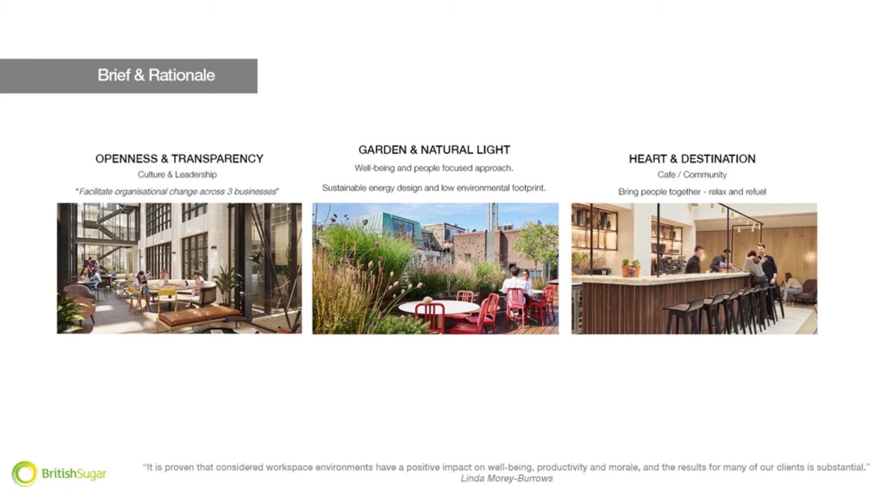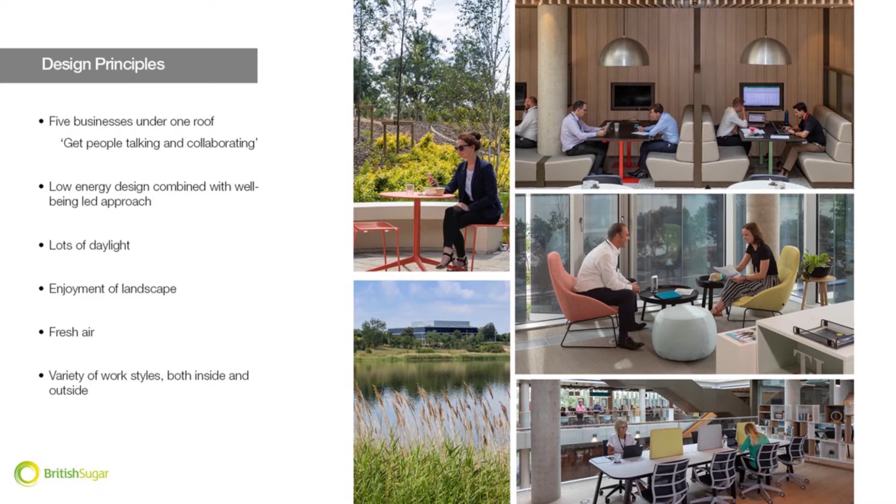From this thinking came these key design principles: a building that brings everyone together collaboratively, that employs low energy and passive house design principles, has lots of daylight and fresh air, and a variety of working environments, not just workstations, but other forms, as you see in the pictures here.

When it came to the site, they were purchasing a site, so they looked at a number of sites and chose this one in Hampton in Peterborough because, for a number of reasons, there was a nearby lake with walking routes around it that they could connect into, which they liked. It had, as you can see in the green around the top of the site, an existing landscape belt that could be reinforced and exploited for external spaces. We were able to form a new access onto the main road, which was key because it meant people could come directly to their building without passing other people's buildings on the way, and they liked that for what was an important corporate headquarters.

When it came to the actual form of the building itself, we settled on a square form, as you can see here in the plan, slightly raised, with views to the lake just to the east, facing southwards and nestled into the landscape belt. So we formed quite intimate external spaces around it. In this picture you can also see another building, greyed out to the west, which is actually a second phase we got planning consent for, but it's not being built at this point.

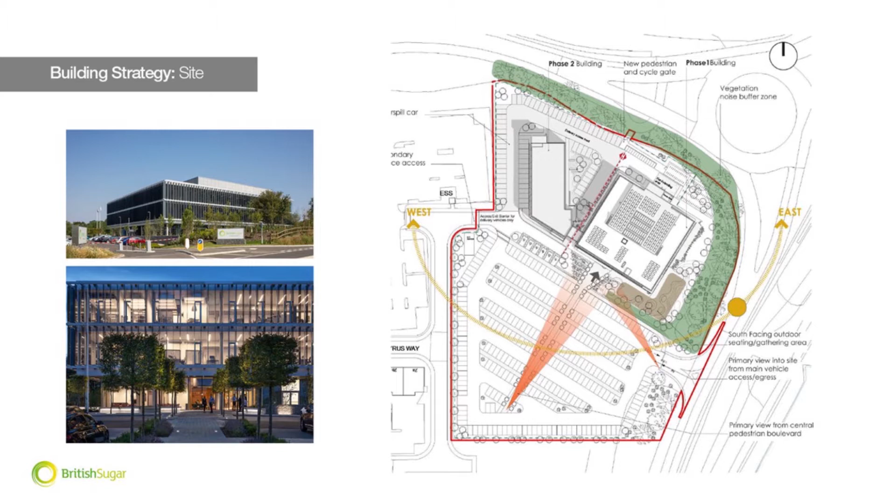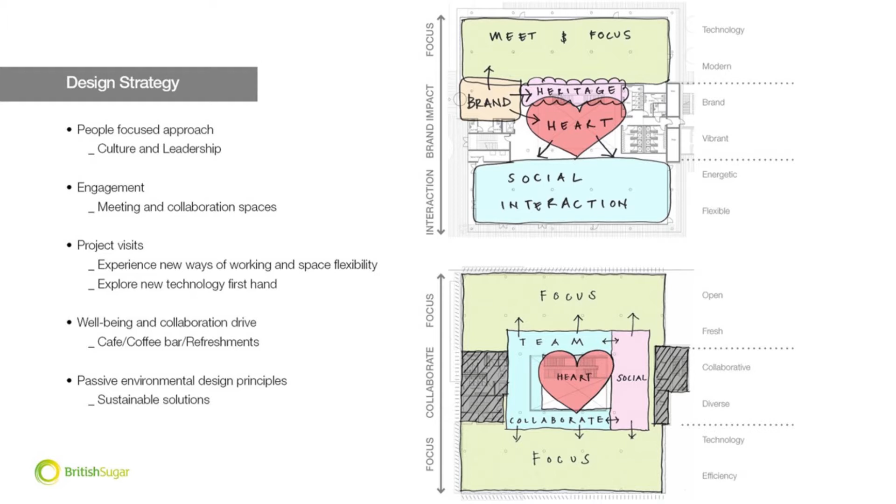When we started looking at the detail of what we were going to do inside, we made the decision to have a central atrium as a unifying feature, which we called the heart of the building. We decided to avoid any workstation areas at the ground floor, dedicating that space instead to social, collaborative and meeting room spaces, with all the workstations on the upper floors. The most focused work is against the windows in the quietest areas, with more group and team working areas towards the atrium, creating a gradation both away from the atrium and from the lower to upper floors.

I'll now hand over to my colleague Ajay, who will talk about the building and the layout in more detail.

This slide shows the relationship of the heart of the building, the atria, and its vertical and horizontal relationship to other spaces. This is quite an important space because it links many of the other spaces above and below it. The atria is really the heart, giving that element of connection to all other parts of the building.

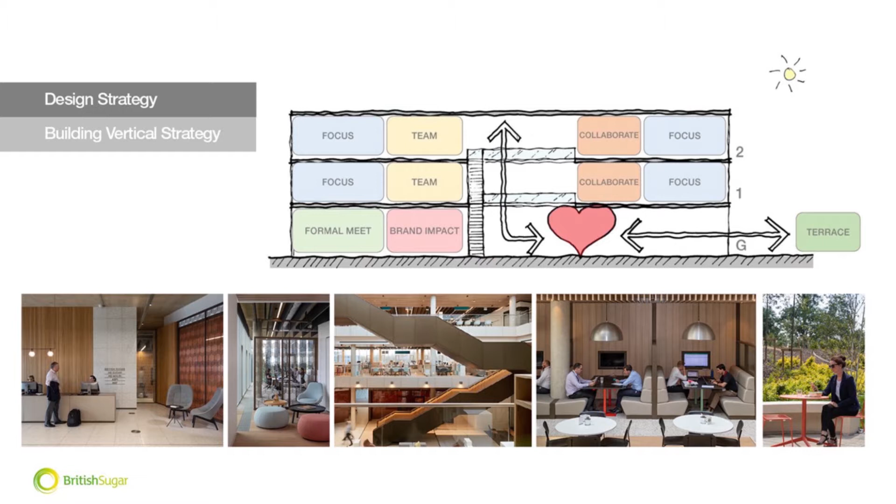This slide shows the ground floor. As I mentioned, the ground floor is quite an important element within the scheme. It's the main shared space for ABF and the overall companies, containing key spaces which allow for social interaction and collaboration. It has formal meeting areas, conferencing areas, some bar space which is good for health and well-being, and a social restaurant space.

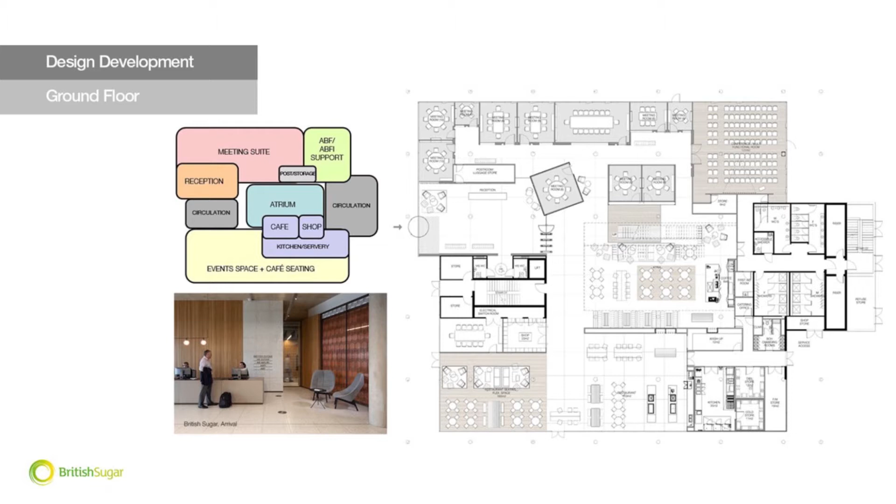The restaurant space is linked to the enhanced landscape buffer zone on the southeast of the site. From there you've got the main heart, the atria space, which has its own cafe and its own coffee bar with its own barista as well.

Another part of the atria space is that it also contains the key vertical circulation within the building, the main staircase, which links all the floors together, allowing for interaction and collaboration between different departments. We've actually hidden the lift away so people use the staircase far more within the building.

This slide shows the heart itself, the atria. The whole idea was to create an environment that was more visible throughout the whole development and create more of a buzz, to be honest with you. In the existing building on Sugar Way, you could hear a pin drop, and the logic here is that you've got a central space which reaches out to other social spaces on the ground floor, with dedicated work zones above.

This atria building, in essence, has a variety of furniture settings for different work styles and for different kinds of tasks that people want to do. The quality of light is quite important too, for different tasks, which I'll come onto later.

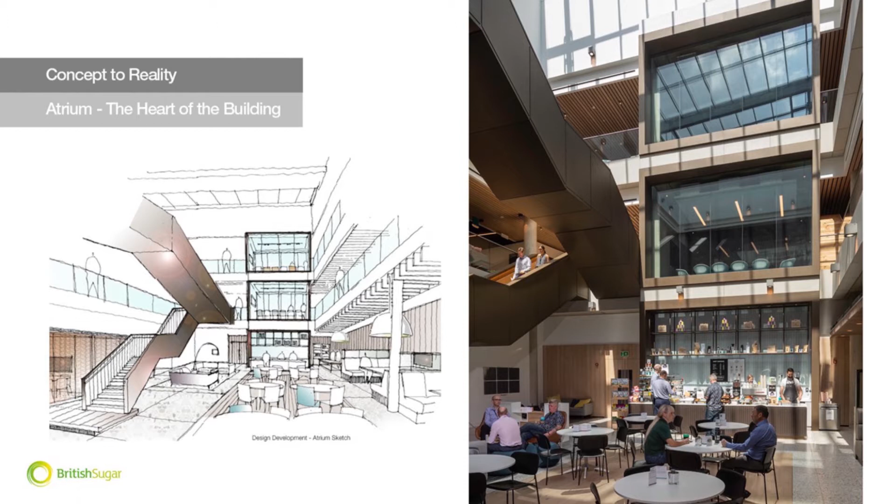You can see in this slide the branding we're trying to achieve by using a different palette of materials. The building's predominantly concrete, so we've used warmer earth materials like timber and stone, and certain fabrics to help soften the space. It goes back to ABF's agricultural business as well, so there's lots of metal in there, like an agricultural bronzy colour, and it's quite important that runs throughout the whole of the scheme.

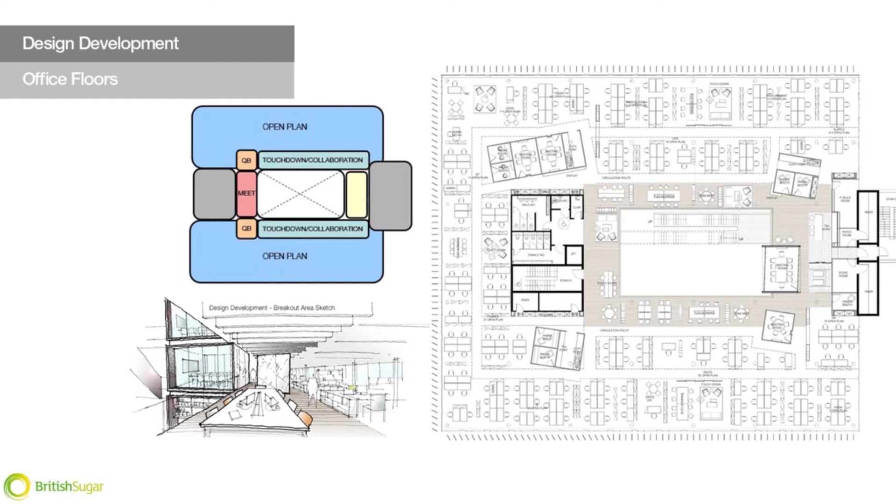This slide shows a typical first and second floor plan layout. As you can see, it's a simple open plan office layout, with formal desking, meeting rooms, quiet rooms, telephone booths, tea points, and flexible working areas. The majority of formal desking, which is more focus-based work, is on the perimeter of the building, filtering in as a hierarchy from the outside to the inner part of the atria, where you've got more collaborative touchdown points and social areas. It's really about creating different working environments for the actual users at the end of the day.

This slide shows the different breakout touchdown points within the building. Again, we've tried to use the same palette of materials throughout, so there's a common theme, a common language throughout the whole of the scheme.

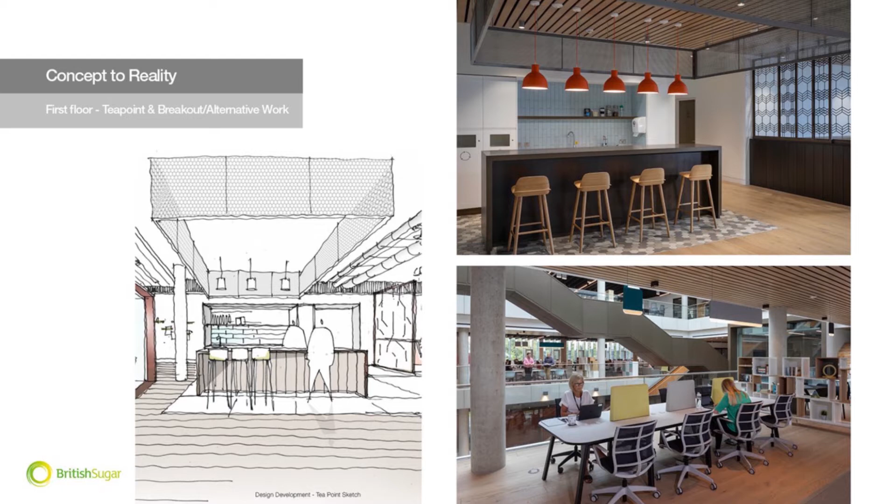And it's just creating these different working environments for different users and how they want to do that. What we've done, we've created the touchdown breakout areas adjacent to the atria, so there's this natural flow down to the ground floor, and really to create that hierarchy of noise from the outside, which is more private, going a bit more busier within the center of the building.

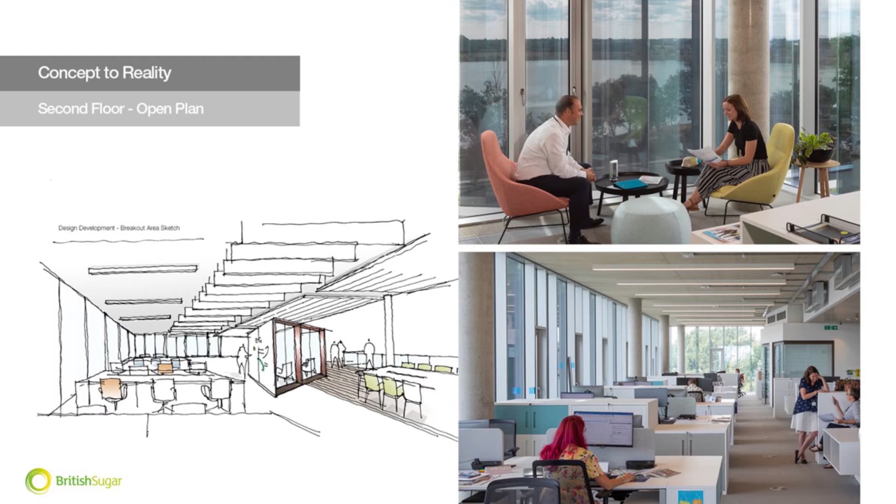This slide shows really the key element of the build, which is the internal environment of the building. The office floor plates on the first and second floor, with British Sugar on the first floor and the other companies above there.

The building is predominantly 80 to 90% glazed. So it's very important, the quality of light, good quality light, as within controlled light, how that is actually filtered into the building. We've worked on the premise of passive house principles for the building, and we've done that throughout the majority of our office builds. So what we've tried to do there, we've tried to look at the fabric first, super insulation, the PassivHaus envelope, a mixed mode ventilated building, good daylight, facade engineering.

You can see from that sketch there, the windows wrap around the whole of the building, and this is to get as much light deep into the building, and really the views as well. The views are amazing from the site, so it's to utilize and capitalize on those as well.

So that's me on this element here, and I'll pass you over to Ashley to talk about the M&E strategy.

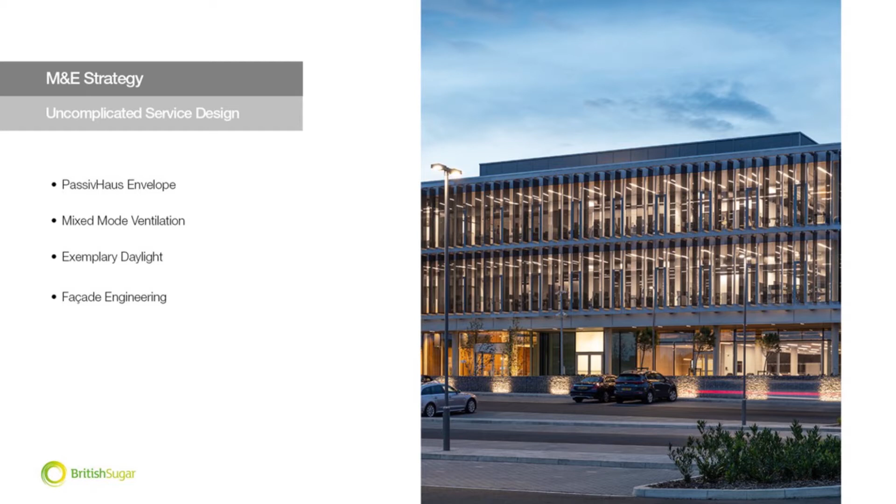So you've got this 360-degree glazed vista to the building, which gives floods of daylight. But where you've got that much daylight, you've also got the potential for overheating. So that had to be addressed within the conceptual design.

Our approach was twofold. We've got really good solar control glass, which provides itself a G value of 0.38, which means 38% of the solar heat transmittance is allowed through into the building. And then on top of that, you've got the fantastic glass louvers, which provide a further G value potential of 0.2. So in combination with glass and glass louvers, you've got a total G value of less than 0.1 or 10%, which means you can turn a completely glazed wall into the equivalent of a 10% glazed wall, which had a huge effect on the potential for overheating to the building.

This shows the simplicity of the M&E services and how these services were integrated into the form and the aesthetic of the building. On the second floor, you can see the exposed mass and the facade engineering, which really minimized the amount of artificial cooling that we needed within the building.

You've also got those openable windows, which worked in tandem with the heat recovery ventilation system. You can see the heat recovery plant up on the plant deck above the second floor. That supplies air via the raised access floor system, so it's what we call a displacement system.

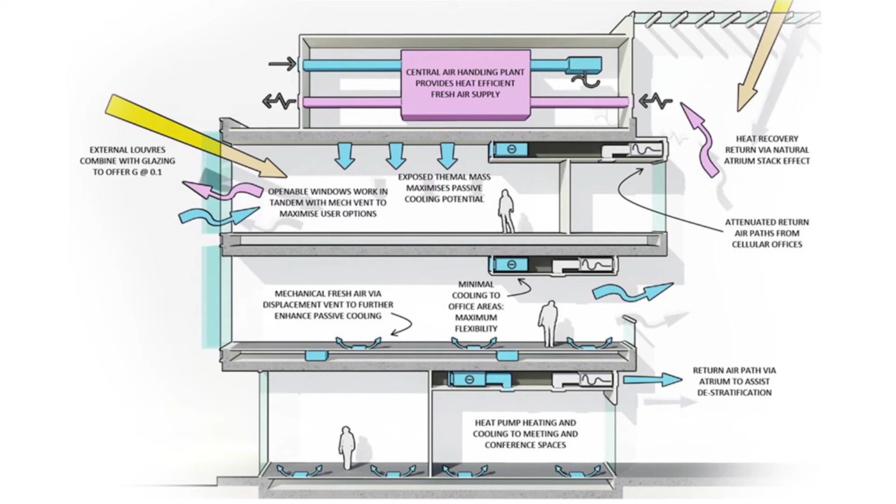Then air is allowed to filtrate back into the central atrium space. And that entire atrium then acts as a plenum, a return air plenum, to get the air back to the main air handling unit. That provided us with a lot of benefits - it meant less ductwork, which had aesthetic benefits, and it provides some offsets to that natural stack effect that's happening because we're always circulating that air.

And it provides a winter heat collection point. So the low-grade heat that gathers in that atrium space because of the stack effect is introduced to the air handling unit. It's recovered within the air handling unit, and the heat only is then reintroduced into the occupied spaces.

So that gives a summary of the elements that we introduced to minimize the amount of heating and cooling to the building overall, which in turn minimized the fan coil unit installation. The fan coil units were limited to specific bulkhead areas, and that meant that the general aesthetic principles of the scheme weren't compromised in any way.

Hopefully the next slide, we've got some photos which illustrate this. On the top left-hand side, you can see, dare I say, the beautiful glass louvered system. On the bottom left-hand side, we've got the limited fan coil unit installation. That's the south-facing office elevation.

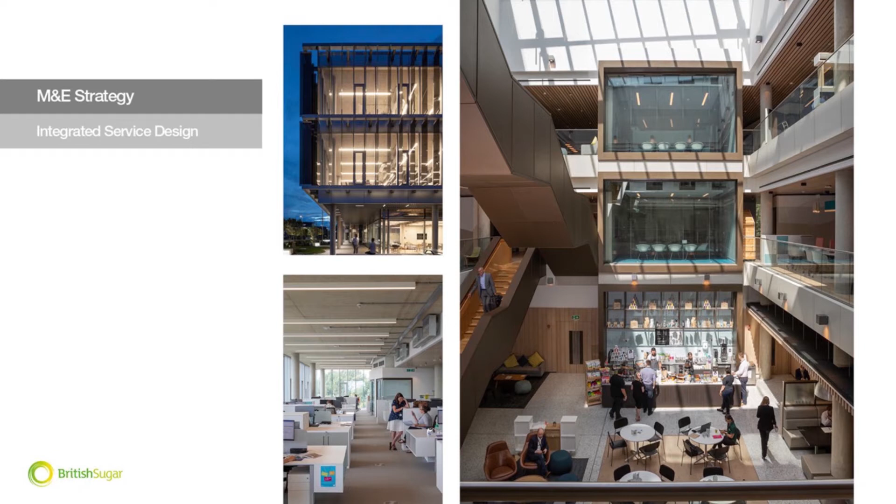You would expect that to be covered with cassette units and fan coil units, but they're very limited to the central areas only. And the big picture on the right is the atrium space, which obviously provides the heart of the building, but also from our point of view, acts as a functional part of the M&E strategy. And I think that sums us up.

So I'm going to hand over to Wayne, who's going to talk about the fantastic structures.

Hi everyone, and thank you ProCon Nottingham for the opportunity to be part of this presentation. I'm Wayne Howland and I'm an associate for Curtins. I was the lead civil and structural engineer on Project Greengrass. Project Greengrass was a fantastic project to work on for both the civil and structural engineering challenges and also to work with the design and delivery team again. We've got a really long and successful relationship delivering projects with CPMG and CPW as local Nottingham consultants, and Project Greengrass was no exception to that.

I could spend the day presenting the civil and structural engineering challenges to you for this particular project, but there's a lot of other great stuff to get through, so I'm going to keep it brief. Feel free to ask me to expand on anything in the Q&A afterwards.

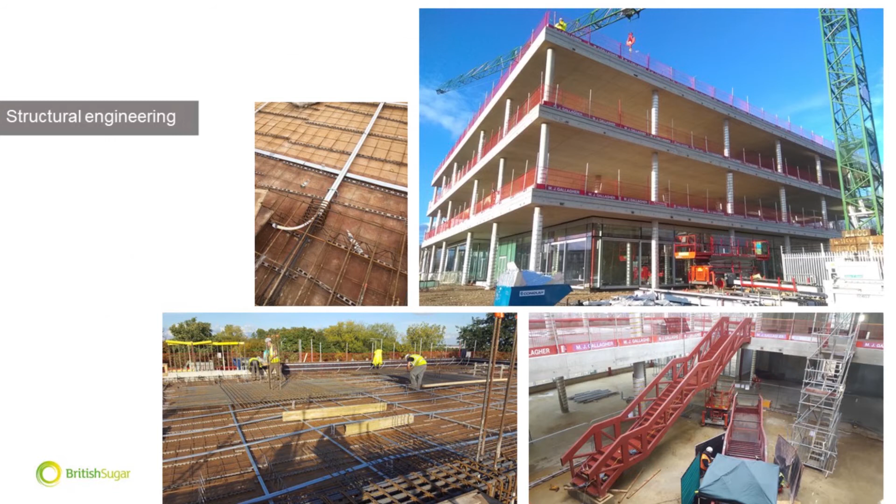The first big challenge was the ground. The site is formerly a quarry for Oxford clay used in brick production, and then it was remediated with PFA fill to form a 7 to 8 metre deep PFA lagoon. The building actually straddles the wall of one of these pits, making for quite an interesting and involved pile foundation solution.

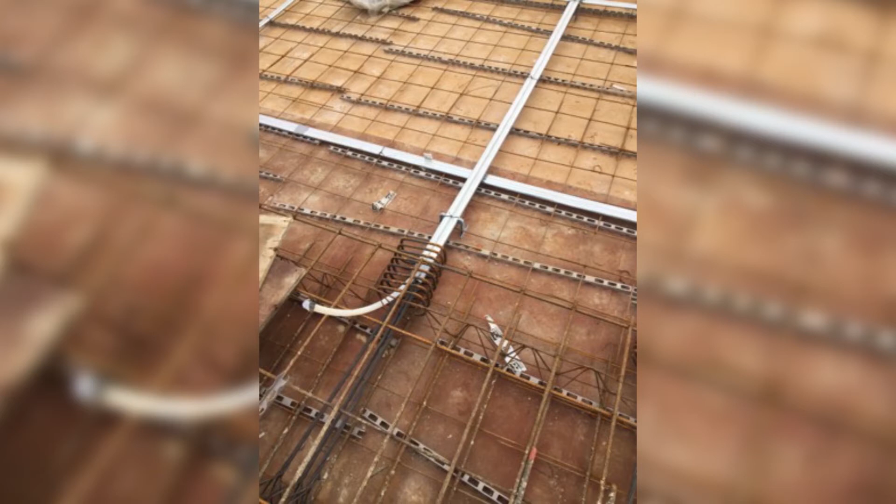The piles had to achieve the same performance in both the competent ground and through the PFA. We also had the big risk of hitting the side of the pit wall with the piles, which was going to cause them to break off. You can imagine an inclined face and driving a pile into an inclined face, it would just split to one side. So we ended up using a mixture of different sized precast concrete and tubular steel driven piles, dependent on the location and the likelihood of them breaking and the depth of the fill.

The site is a fairly big space. It's got a lot of staff amenity, but a significant part of it was dedicated to car parking.

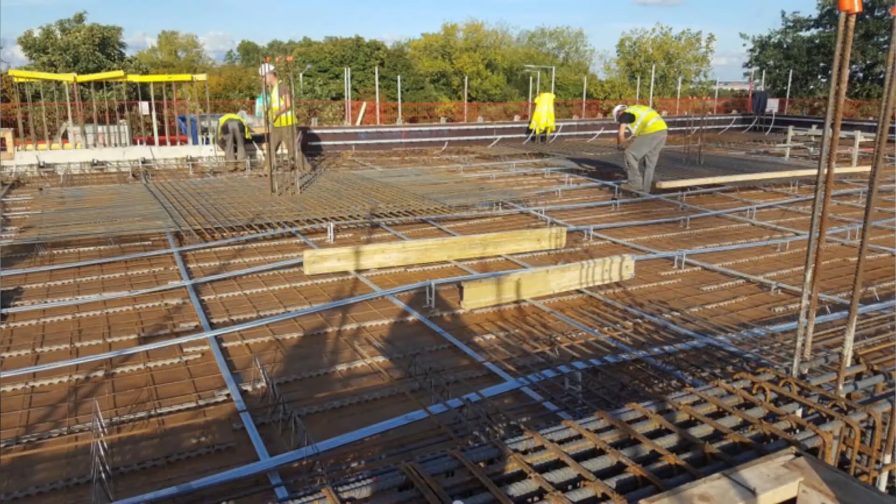Thinking about surface water management, we went through multiple options and landed on a full sub-base attenuation solution where the parking bays were formed using permeable block paving, which filters the runoff before it enters the pavement sub-base. The sub-base is then voided, allowing flow control and conveyancing, reducing some pipe runs. It's a big plus for water quality and for limiting the amount of excavation and disposal.

We were also able to provide other solutions on the scheme, such as rainwater harvesting, filter drains, and tree pits. All in all, a very sustainable and cost-effective surface water management solution.

For the building itself, the main aims for the structure were to provide a simple and flexible space to facilitate the M&E solution and the high spec interior. The space had to be adaptable and wouldn't need significant structural alteration in the future.

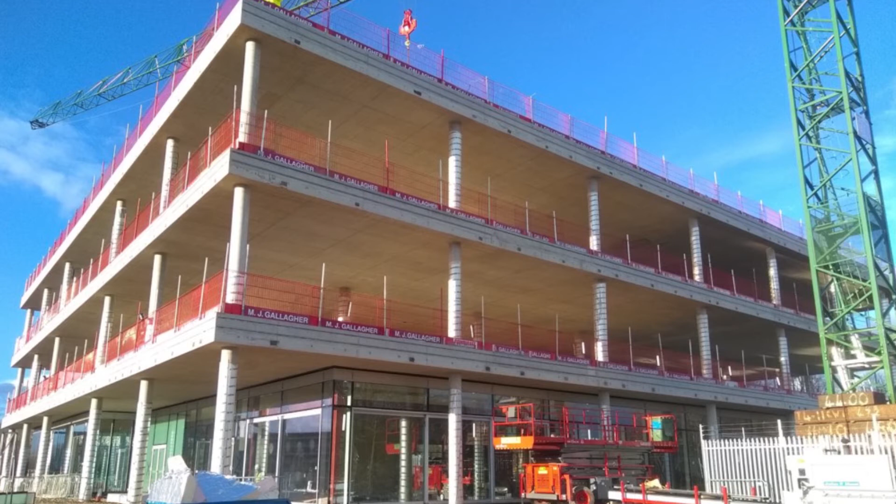Through the various options, we landed on a reinforced concrete frame on a 7.5 metre square grid with a steel framed upper plant level space.

Post-tensioning was then introduced to the flat slabs at floor and roof levels as part of value engineering. This had a significant impact on the building's embodied carbon and also economically, as we were able to use materials way more efficiently than using a more traditional flat slab.

The concrete soffits and columns were all exposed throughout, which I'm sure you've seen in the images prior to this and the video. So there was a need to provide a really high quality finish to all of the concrete surfaces. We ended up working quite closely with the concrete contractor to come up with a method of formwork and casting to get this right.

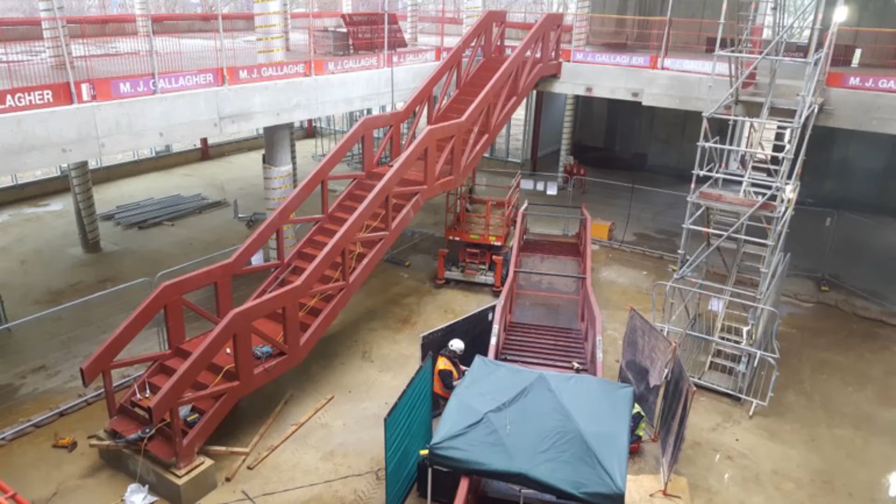The last big thing I want to touch on with the building is the atrium space, which is a really large space, a great space. The main structural challenge there was the long spanning stairs, which we designed in steel. We managed the dynamics of that as the design progressed to ensure we met the client's expectations. There's a lot of middle ground in where you go with long spanning structures.

So that's a whistle stop tour of the civil and structural engineering on the project. It was a very quick run through. Feel free to use the Q&A session or get in touch with me afterwards if you want me to go into more detail. Thank you very much.

Thanks, Wayne. Following this presentation, there is a video in which our client talks about the success of the project, and I take you on a video tour of the building. The video was prepared during COVID, so the building's empty and a lot of furniture has been removed. So the next few slides have been included to show you more imagery of the building as it was meant to be, and include some nice words from our client.